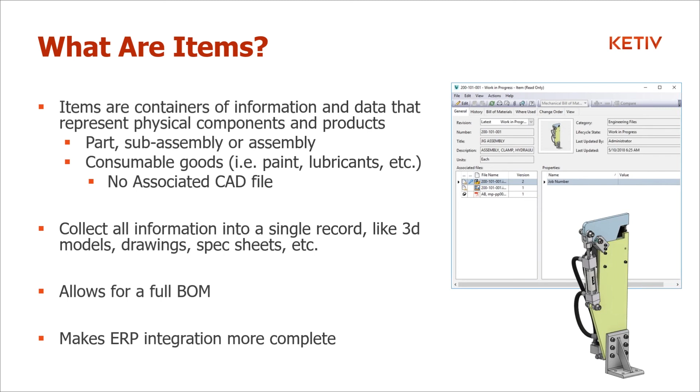So what we're going to talk about today is really the out-of-the-box functionality, if you will, with some configuration in a lot of cases, of course. But as far as being able to work with an ERP system, we're going to be talking about exporting this information manually. But a big step forward, right? Before, if anything, we'd have to maybe do an Inventor export of a bill of materials, or a sheet or a table or something like that.

So we'll be going over a few things. I just have a few quick slides to give a quick overview of what we're going to see. Some of the things we're going to jump into is how do we create these items? There's going to be cases where you don't have an item already, so we can create it from scratch. Think lubricants, grease, standard things that you might not necessarily even create a CAD model for. You can also create these items first before you create the CAD model, by the way. Not sure if a lot of you who have Vault Pro already know about that, actually.

And so what will happen is as we create the CAD files and we create items out of them, they automatically grab all the information from it. So the property, the description, the part number, stock number, all of that gets grabbed and it puts it into Vault for you to be able to view it inside of there and not have to just rely on looking at a drawing and opening that up. Thus, why Vault Pro is so much better for a larger organization, not just the CAD user anymore, right? Now we can have more people be a part of this entire process.

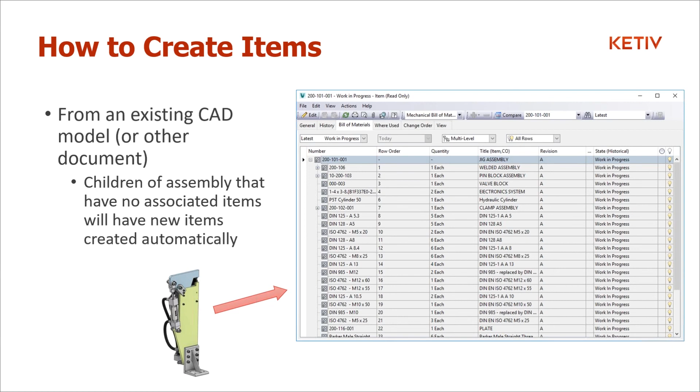And then as we start making modifications to our models, we can make updates to them as well. Maybe the description changes, maybe we remove some parts, add some parts. We're able to update these so the bill of materials is correct, and we can release these files and get them out to ERP is what it really comes down to, or to your ERP system or someplace where purchasing can get to this information.

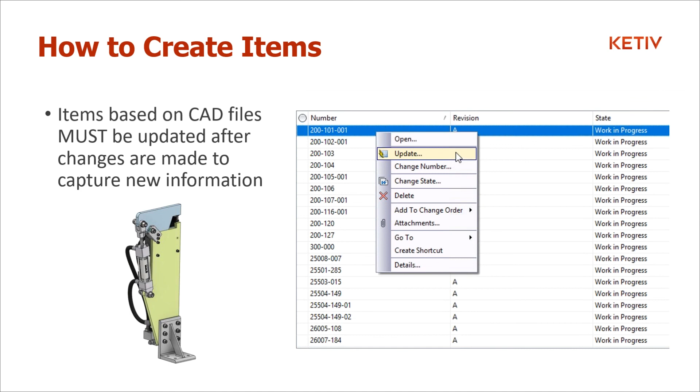So it'll create a bill of materials based off of those files. It can be any one single file. It can be an entire assembly, and it'll grab all that for you. There's a misconception out there sometimes where, well, the drawing has my parts list. You're right, it does. But all the drawing is doing is just reporting to you what the assembly has inside of it. And so the assembly really becomes what I'll call the master file, and that's what holds all the information, and that's what gets pushed to the items. You'll see this, of course, as we move forward through this demonstration. But I just wanted to make sure everyone understands that all this information is coming really from the parts and the assemblies themselves.

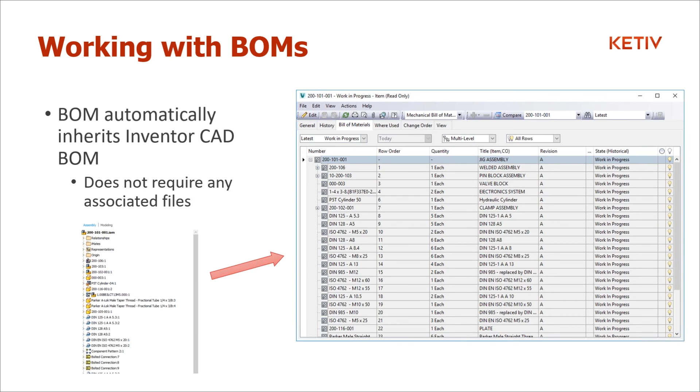And once we get into the actual bill of materials inside of Vault, one of the things we'll go over is how we can add more to it. A lot of times we might not have everything modeled, or we might have not thought of everything up front. In some cases, maybe it's someone after we've actually designed it that needs to add a repair kit or something like that, and you already have it in stock. You already have a part number for it. You don't have to model it, so we can always add existing items into here as well. We'll make sure to show you that.

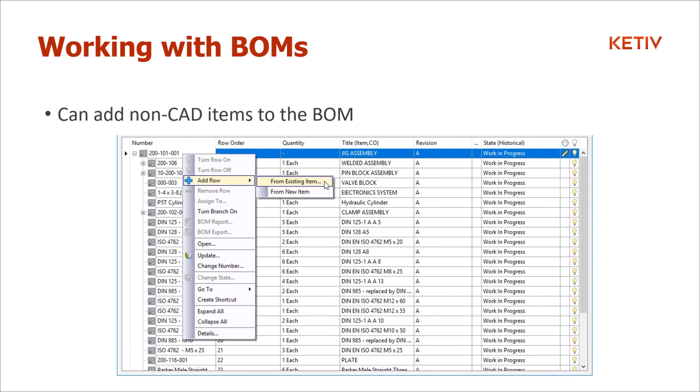And just like in Vault, with everything else, we have the ability to customize our views and the information we're seeing, right? So do you want to see the revision? Do you want to see the quantity? Do you want to see what state it's in? We're able to customize all those, and we'll show you that too.

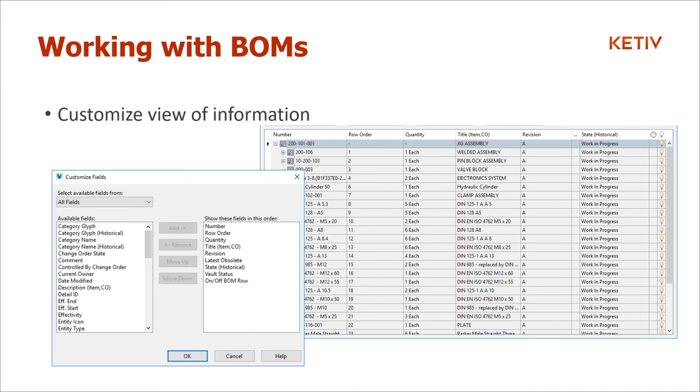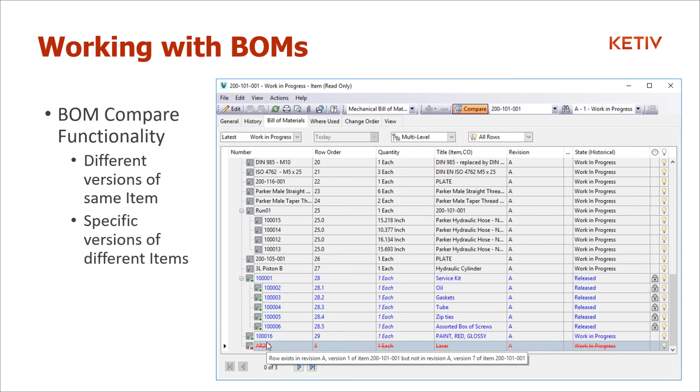And here's a really big one, I think, is being able to compare BOMs. How many of us have been in that situation where we're working on a different revision now, but we don't necessarily know what the difference is between the last one and the one we're working on right now. So we have the ability to compare different revisions as well as different assemblies, by the way. Maybe you did a copy design and you can't quite remember what happened last, or maybe somebody else was working on it and you want to see what the major differences are between these two assemblies. What components were added, what components were removed perhaps. So we'll show you some of that also.

And lastly, when it comes to working with this, again, the ultimate goal is that someone else now can view this information. We can now export this information. And most of all, that it's released information, that we're able to do this when it's actually time to, and we don't pull the trigger, so to speak, too soon, right? And we're able to get the right information at the right time, be able to get this information across to something like an ERP system.

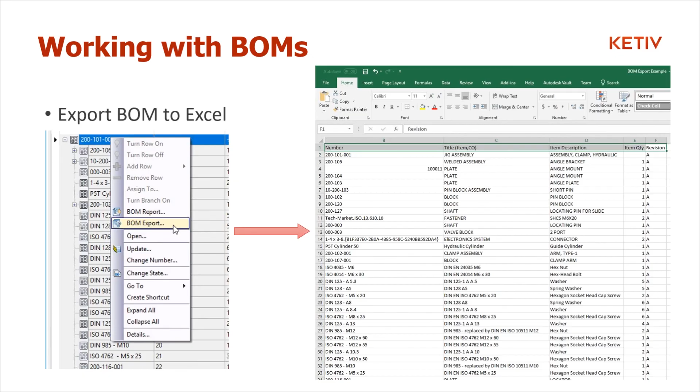So without further ado, I just wanted to give that quick introduction. We're going to talk through all these things right now, of course, and show it to you. So let's go ahead and go to our Vault. So what I'm going to do here is I'll just do a quick search. Of course, I could have just added it to my shortcuts. Sometimes I just like to highlight some of the tools we're using inside of here. But we have this assembly here.

And inside this assembly, we get to see the history of it, how many versions we have of it, and what files it uses. I'm going to go through the example of first showing you what we do with a single part. Let's say this is a long lead item, for example, and you want to be able to release this and export it right away. We can surely do that. I just want you to take note.

I'm going to go over to my right-hand side here on my properties grid, and this is all the iProperties of the file. So I'm not sure how many of you are already very familiar with Inventor or not, but in Inventor we have iProperties that have like description, cost, manufacturer, things like that. We can have custom properties as well. And here it's showing me basically all the things that are filled out.

So we'll simply right-click on this file, and we're able to say assign an item. So since it doesn't have an item to it already, it's not updating it, it's actually creating it from scratch. And the way I have it built right now is that it's automatically going to take in the actual value of that part as well. So it just gave it that number. But we can have this either be a mapped value or it could be a sequential number, which you'll see in just a moment as well.

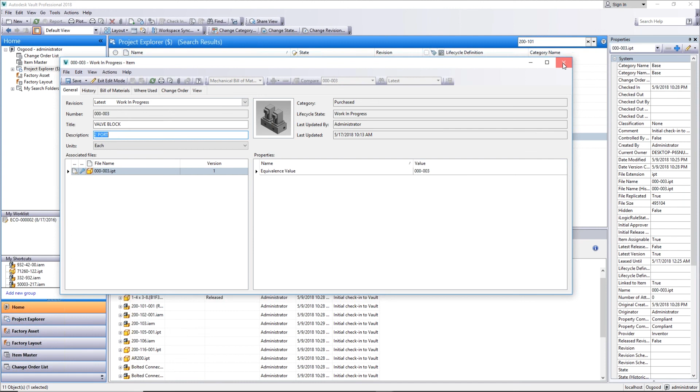Now that we looked at how we do this for one single part, let's take a look at how we do that for an assembly. So to this assembly we have here, I'm going to right click it and, same as I did for the part, assign an item. What this is going to do now is it's going to capture what parts have not been assigned an item already. So if we go to the bill of materials, for example, here, we see a long list of all these items, and then there's a column here called vault status. And this lets me know that it's actually creating all these items.

However, this one's blank, and that's because that's the one we created ourselves manually, the 003 part. So this is a nice, quick way to be able to identify what I did manually before I move on, right? So we can do that here. All right, I'm going to do a quick save to this so that it generates all these items. And now you see it's cleared because it's now created and saved all those items for me in my vault.

Now what I'm going to do is, remember I talked about, hey, we want all the information we need to be able to manufacture this part. That might include a spec sheet. So much like we would attach something to an email, we can attach something to this item as well. If we come in here, we can hit the attach button and browse for the information we need. I'm going to go to the Allen Bradley spec sheet here that I want to add to this assembly.

When I do so, if there's multiple versions of it, I can pick which specific version I need, in case maybe we're backtracking or there's newer versions and we want to make sure we have the right one. And we can also pin this. Pinning it means that it's not attaching itself just to the file, but to the item itself. Let me rephrase that one more time.

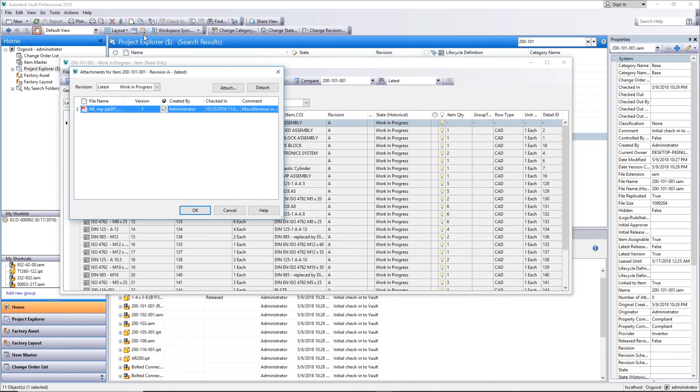There's a regular attach button that we're used to using from Vault Basic even, where we can attach things to a file, but now we want it to be with the item, so we'll go ahead and pin this, and we'll see the result of that in just a moment. All right, we'll save this before we move forward.

And now you'll notice if I go to the General tab, sure enough, that PDF is pinned right here. So if anybody goes to this item, they're going to see these two things, the assembly and that PDF. So that's great. That's part of what we need. But what if we now need to go and make some changes inside of CAD? Not a problem at all.

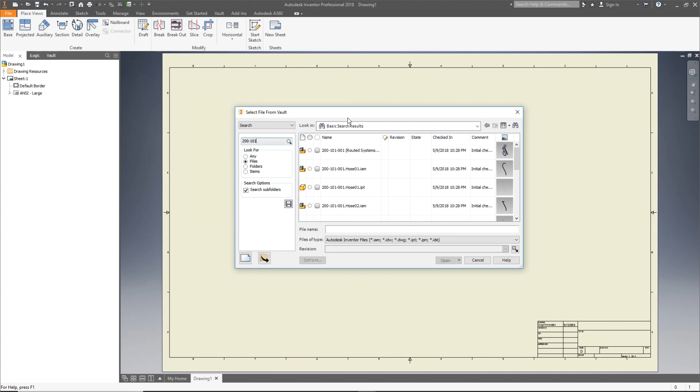What I'm going to do is go over to Inventor and use my Open from Vault button. And I'll just do a quick search. I could have done shortcut again, but I don't know how many of you are aware that you can actually search right inside of here when you do an Open from Vault inside of Inventor. It's a standard practice and workflow recommendation from Autodesk to use Open from Vault, by the way. So we'll go ahead and open up this assembly and check it out.

And we're just making some changes. We'll go ahead and update all the properties as well. Not that it's necessary right now, but whenever we can, I'd like to run that. So we're going to make a few quick changes to this. These changes could be anything from, hey, you know what, I need to delete this component and make sure that my bill of materials doesn't show it anymore.

In this case, I need to do one more checkout of another file, and that's okay. We've deleted that component. But maybe we have to make other changes. Let's make a change to the description, for example. So we'll go to the iProperties and we'll go to Project and change that description right there. It's not a bad description by any means, but I'm gonna change it to assembly clamp, and I'll just abbreviate hydraulics here. We'll go ahead and save that.

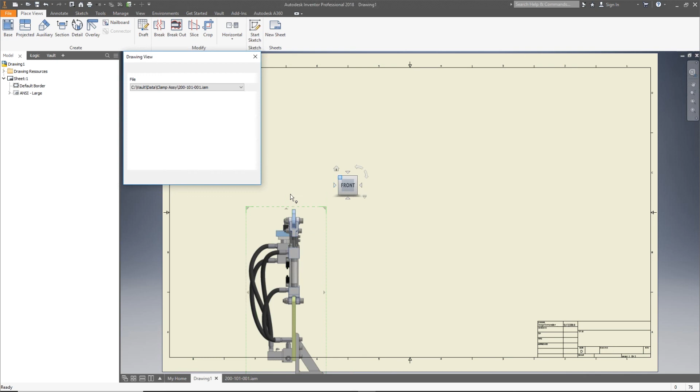And we'll do one more thing. If you remember, we don't have a drawing, so we'll go ahead and create a quick drawing here and just put in some base views. We won't make this an Inventor demo necessarily. And just clean this up real quick. Great. Of course, there's much more we could do. We would normally want to put a parts list here, perhaps, and dimensions, of course. But for now, to show you more about items, let's go ahead and get this saved and check it in.

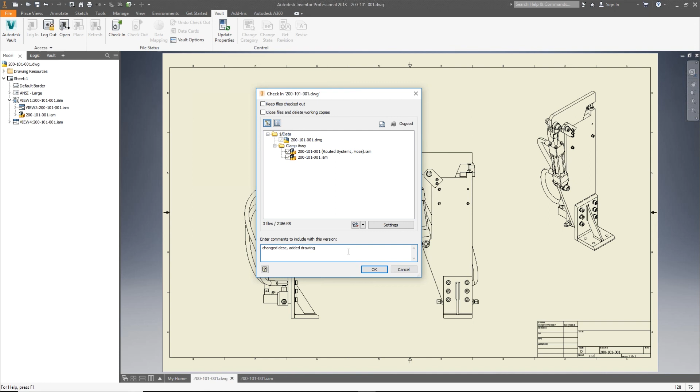I always like to add my comments in here. Perfect. Now we're going to go back over to Vault. I'm going to go to this Vault here. And we'll also bring this one up. Here we go. So if we go back to this assembly, you notice I can right-click here and I can go to that item. That's one quick way to do it.

Also, down at the bottom left-hand corner, we have the item master where we can see every single item and we can search for it as well. I personally like to use these shortcuts of just right-clicking and being able to go to it. If I do that, though, you'll notice the description is still the same. The drawing is not inside of here. How do we fix that? Well, it's not necessarily a fix. It's actually a workflow. You got to make sure you update it. So when you right-click this item, you can just simply click the Update button.

And it's going through, checking everything. Sure enough, my description's there, and it automatically grabbed the drawing. Notice, by the way, that the primary associated file is still the assembly. Again, that's where it's grabbing the information. The PDF, the drawing, those are just bystanders, if you will, other ways to portray the information that you need. So now we're able to very quickly update that item and have the latest and greatest inside of here.

Now what I'm going to do is let's take a look at the bill of materials and make some changes to this. The first thing I can think of right now is, well, what if we needed to add more? We talked about being able to add from existing items that we already have in here.

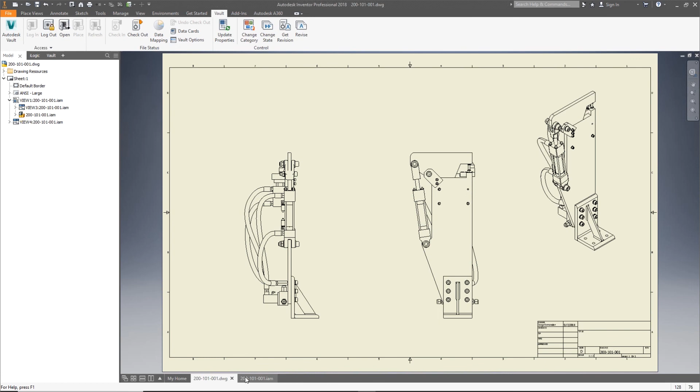Now that we've gone through how to add existing items and create new items, one other thing I want to mention is, how many of you are used to using the create option inside of Inventor? When I'm in an assembly, we have a create option here. Some of you might already be used to this, where you simply create a part in the context of the assembly, but there's also one called a virtual component.

What this does is create a placeholder for the part - it could be grease paint, for example - and it won't create a model or an IPT. It's just a placeholder. It'll show up on your parts list, and it'll also pick it up inside of Vault Professional, saying here's a new item, and you can create an item out of that. It doesn't matter if the chicken or the egg comes first - you can do it in Inventor, or you can do it in Vault Professional. Either one is completely fine.

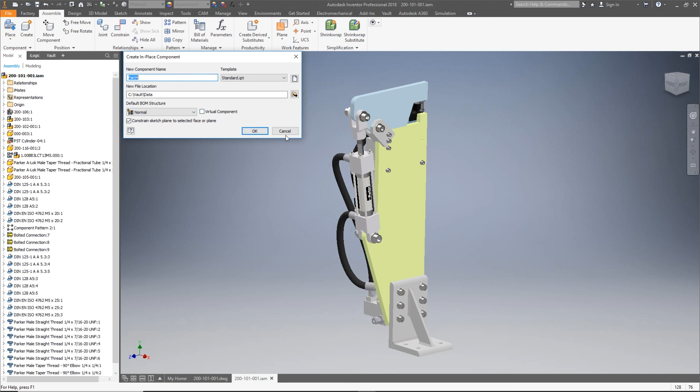All right, let's move forward here to just a few more things. Now that we have all this information inside of Vault, how can we leverage it? What's the ultimate thing we want to do? Well, first of all, I'm going to exit edit mode.

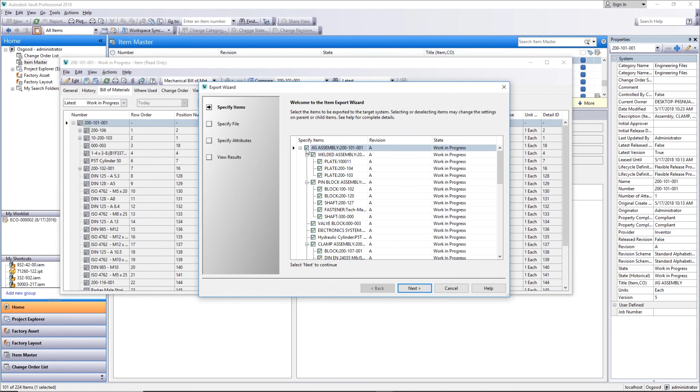We can right-click this now and export this bill of materials. When we export it, we can choose exactly which ones. In case you had long lead items and you had a small batch of files that you wanted to release first, you could definitely do that.

I'll go ahead and hit next here, and you'll see that I can create a CSV here. So we'll just give this a quick name on my C drive - item BOM is all I call it. And then I can choose which properties I want to use.

I can simply click and drag all the different ones that I want to use over here on the right-hand side. I can drag them from left to right or right to left to remove them. And I can tell it what name it's going to take on in the ERP program, wherever I'm going to import it to. I can also change the order of these.

So if I wanted item quantity first, so that it'll make things easier for you, when you import it in, it'll be formatted the way you need. You can move these around just by dragging them up and down as well. We can also save this mapping, so we don't have any inconsistencies, and we can make sure that everybody on our team has the exact same method they're using to import this stuff.

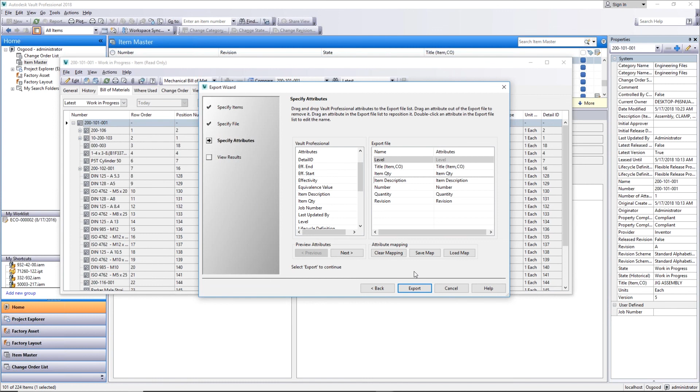When we hit export, it'll go ahead and create that for us and give us a summary before we hit finish to make sure everything looks correct. And that's how you can export the bill of materials.

Let's go ahead and show you what that looks like too. Let's see, I put that on my C drive. So it's an Excel file - CSV, as I said, is your option there. And here's the example we have. I'll just simply select all the columns here so we can quickly make this a little bit bigger. And sure enough, all the information we had earlier shows up right here.

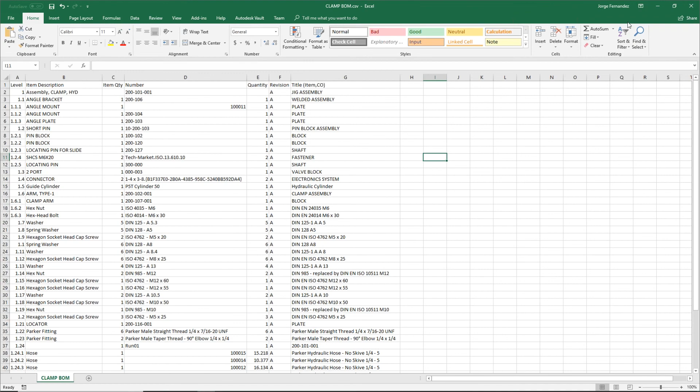All right, one last thing I want to go over - if you remember, I was talking about doing a BOM compare. So what I'll do right now is I have another file that I have to work with that I did a copy design on. This is probably one of the best examples to show it with. So I can go to the item for this, open it up, and under bill of materials, I can hit compare.

Now, if I hit compare right now, I'm choosing what revision I want to compare it to - what's the latest revision of it. But in cases where I want to compare it to another assembly, I can do a find here, a search, and find that other assembly. In this case, it's a copy design assembly that I have. So when I do that, it's going to compare 932.42 with new 932.42. I'll hit compare, it goes through all the items and takes a look, and you'll notice I can hover over them and it tells me where it exists and where it doesn't.

So it's telling me the row exists in revision A, version 1 of the item new, but not in revision A of the 932. The blue here shows you what things were added to this one versus the other one, so it always depends on which one you open up first. Remember that part. According to that, it shows you what was added and what was taken out here versus the other one.

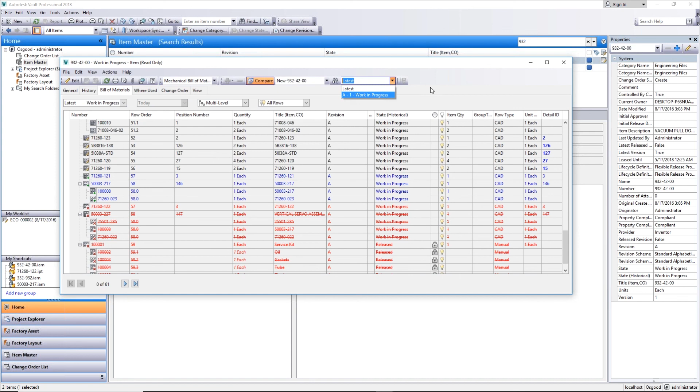All right, so that's basically what I had here to show you today. I wanted to do an overview of items inside of Vault Professional, some of the capabilities inside of there, how we can create something from scratch, how we can utilize the ones that are already in there, compare the bill of materials, and most of all this is coming from the assembly itself. So our end goal is so we can export this out, get these items purchased, and we're now empowering not just yourselves, but other people in the organization to be able to check, take a look at this, edit it, export it, and be able to use it downstream so we can get this to manufacturing correctly.

First question, in regards to the bill of materials export, is there a way to combine multiple columns or map them to completely different properties, or maybe combine some properties together, things like quantity, units, so on and so forth?

Somewhat. Not necessarily combine them—you have to do that before you map them inside of Vault, but you can map to custom properties. So you would have to create in your template probably a custom property as well as a new property inside of Vault that it can then pull that information from. Some people have used iLogic, for example, to kind of put an equation together of what that property should have inside of it. And then Vault just simply picks that information up and runs with it, and then you can export that too. So as long as you set it up beforehand, you can do it. If you haven't set it up beforehand, then maybe you need to go back and edit those templates.